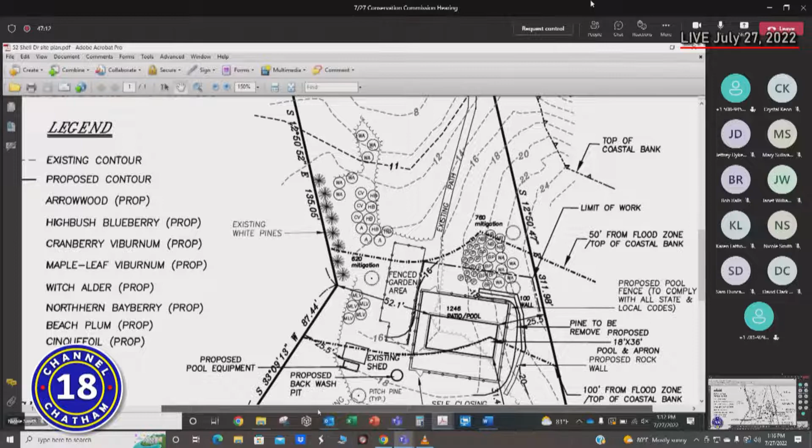Well, it is understood, but we are increasingly asking people to call out mitigation areas and either color code them or shade them, something on the plan. You should have a plan that's colored. I think what she means is you shade the whole area, the 1380 square feet, around in red. Right, I understand that, but in this particular case, what I did was take the square footage of each plant and multiply it by the number of plants, and that's how I came up with the total.

So then we actually have 3 separate mitigation areas. Right. And part of the reason this becomes significant is that when we get to an order of conditions, we generally ask people to demarcate the mitigation area in some way so that landscapers and other people don't inadvertently go in there and mow. With 3 separate areas, I mean, you can see the top left border one is a little bit spread out, so I can put a border around this and hatch it, but then the plan gets real busy.

I wonder if it isn't - that's easily done, yeah. You draw a line around it on the ground as well. I know what we'll end up doing, again like I did with the number, I'll round things off - if there's jigs and jogs all over the place, I'll just put in 3 or 4 stakes as opposed to 20, just to give you a sense of where the area is. Just anticipating down the road that we don't have an issue.

For 59, we're proposing 70 shrubs, including bayberry, beach plum, Carolina rose, along with herbaceous grasses such as American beach grass, little blue stem, and switchgrass planted in between the shrubs.

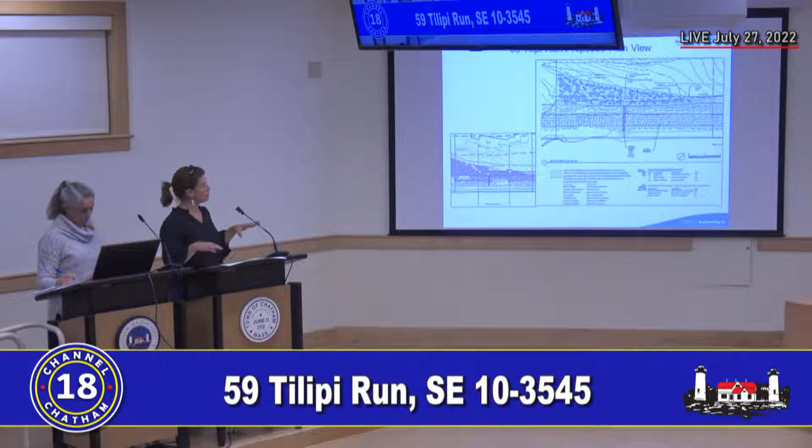For 75, it's a similar approach - we'd seed the area, blanket if needed, and then plant the shrubs. In this case, we're proposing 127 shrubs: bayberry, beach plum, and Carolina rose. Similar to the other project, we're also adding beach grass, little blue stem, and switchgrass.

This project in particular, we're also proposing a 2-to-1 replacement for trees. There are about 6 smaller oak trees that need to be removed because of the construction, so we'd be replacing them 2-to-1 with pitch pine, scrub oak, and white oak - that would be 12 trees total. There are more significant sized trees that fortunately are not going to be impacted, so it's really some of the smaller trees on the site right along the revetment.

I'd be happy to answer any questions. It's a fairly straightforward planting, but it should provide a nice significant buffer of native vegetation for both properties.

Thank you for the presentation. I think typically we like to hear from both sides of the fence, the engineering and the mitigation, because it all sometimes interacts with each other.

We've added the grading, and on 75 we've also added a couple dry wells because of the grading and being able to catch the stormwater runoff.

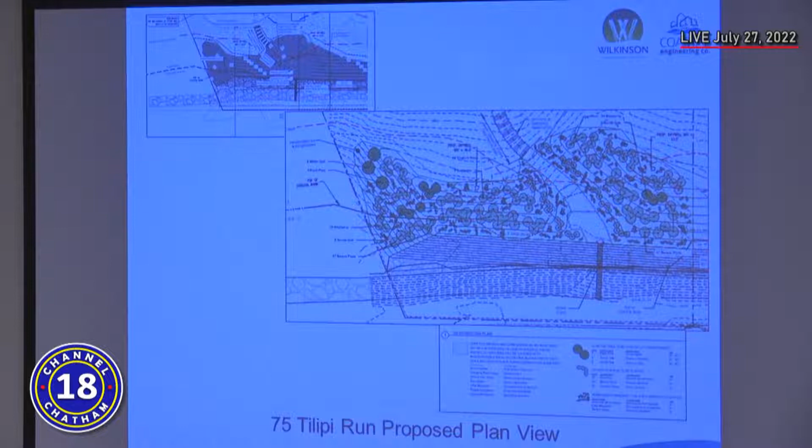It's just that whatever vegetation we are removing or placing the fill over is where their restoration plan comes in. There will be no removal of any additional vegetation in the area below that lawn or landscaped area.

I will ask a question - I know you want to discuss 27 separately, yes if we can. However, I happen to have noticed, or maybe I don't think I saw any mitigation on 27. So is the mitigation on these two supposed to account for it? It is not. Okay, we'll do that later.

So Wilkinson is working on 59 and 75, and Crawford Land Management is working on 27. That will be separate. And due to the fact that there's that return on 27, we had to revise the plans a little more before we were able to get it to them for their portion. And the access is on 27 - there's a couple other things, so that plan is going to be a little different. So they haven't been able to get the restoration plan since we had to get those other plans over to them.

Well, that's good to know, helpful to know. And our revised plans have been sent, all of this has been sent to Greg Berman, and I know we're waiting on him for his report on this project as well.

Have you had conversations with Greg? Yes, we've gone back and I've given him all the updated information. I think he was really hoping for the updated, because we had given him the wave analysis and the initial ones. And then since we've given him the updated ones, I know right now he's on vacation, and he's working on a couple other projects. So busy guy, I don't know when he'll have this one. I don't know, Nikki, if he's given you an update.

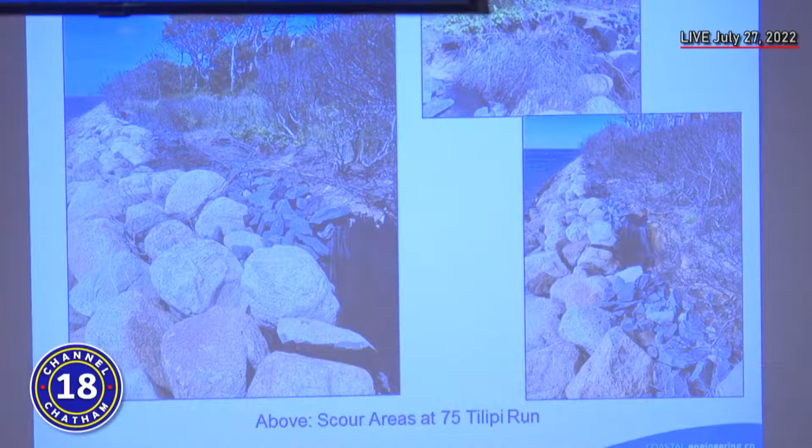So nothing's going to encroach into your new planting? Oh, I see what you mean, from the neighboring property potentially. Is there any way you could put some kind of open area in through there if there are invasives? Sure, I think the way our plan is shown there would be some space between the shrubs and that property line. Just looking from above on GIS, it's hard to tell, but it doesn't look like there's a lot of invasive stuff on 97, the next door neighbor.

It's just something we've increasingly focused on, Katrina, protecting mitigation from neighboring invasive patches. The only thing we've come up with is the mow strip approach. I ask all the specialists who come in here what they think about that, is it an effective or pointless way of trying to protect a mitigation area? It certainly would provide visibility, so you could see if the invasives were encroaching. I think it's a good idea.

Unless it's going underground, which they typically do. Right, the bittersweet roots travel 20 feet underground, I happen to know this for a fact. But if there are, you'll take care of them, you'll eradicate them?

If you added a condition that said we would notify Nikki or something, we'd love that. I would say just, when you go out there, evaluate the property line and see if you think invasives will come over. If there are, do a short 3-foot mow strip between the 97 or 95 and 75 properties. Otherwise, you can go right up to the property line, as you've basically proposed.

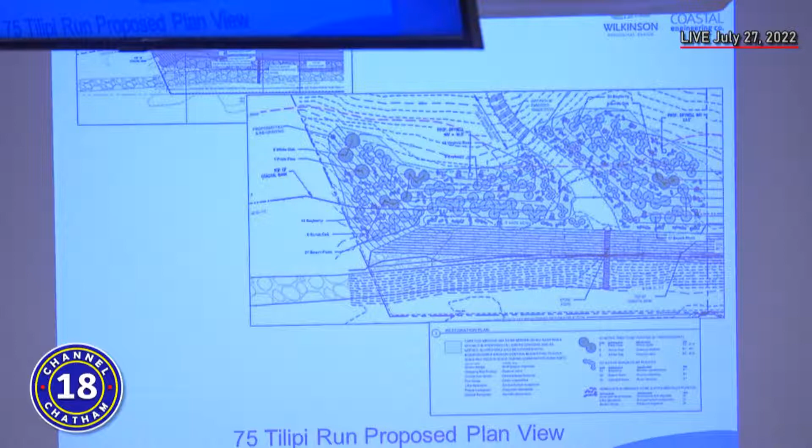What kind of material is that on the path? It's just going to be the dirt path. Where those stairs are now, there's existing timber stairs, but at this point, because there's going to be fill there, it'll just be the dirt path up to some granite steps. We're going to remove, I think, six granite steps - there used to be a number of timber stairs there that are kind of falling apart. So you think the dirt path will be stable enough at the top there? Yeah.

And the angle of the new revetment, will that affect the beach differently? Because we are proposing, I believe, a shallower slope than what's existing. With the shallower slope and the higher revetment, it's going to absorb more of the wave energy and there'll be less wave reflection, so there should be less scouring at the bottom.

We would just request the continuance, get Greg Berman's input. This is basically just an update and a discussion, but what I was thinking is presenting this so we get any of your comments, and we can potentially come back with revisions or answers to the invasive question. I can get those volumes for annual nourishment, and we may give a little more on access if I can talk to Denny a little more for next time. I can work with him, since he's been out there and seen the existing conditions, on getting more detailed construction means and methods before the next hearing. Hopefully we'll have Greg Berman's report in enough time to also respond to that before the next one. So we just have a continuance here for this, August 10th again.

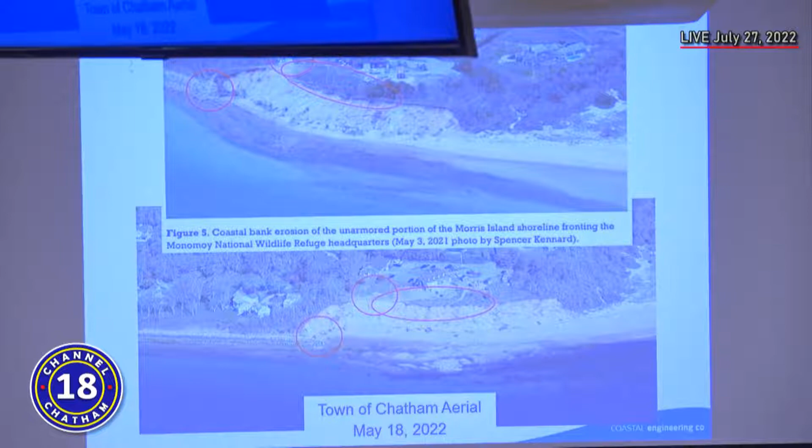Just a couple of updated pictures. I know last time I showed the May 3rd, 2021. And here I'm pointing out, we got some aerials from Ted Keon, May 18th, 2022. You can see the big change in one year from 2021 to 2022 in this area. And I know some of us were out there.

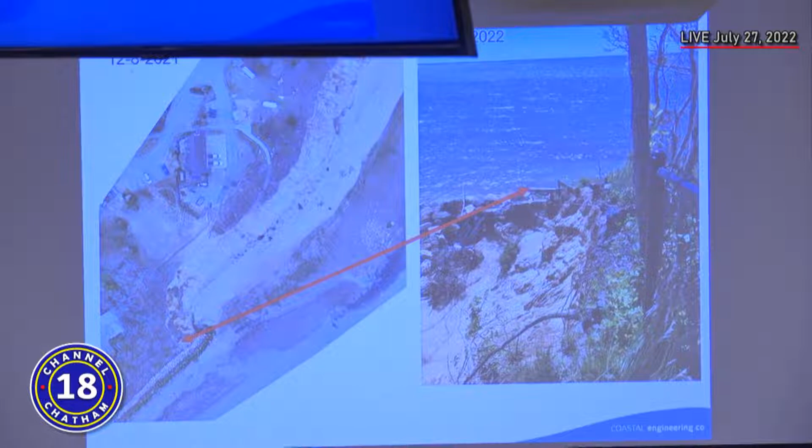Coastal went and did an aerial last December, and I'm trying to point out the stairs on that aerial versus the stairs in the picture. When I was out there, all the stairs are gone at this point. I know we were out there in April, and you can see those upper stairs were there. Then in the picture in June, that black post is the fence post. I would not suggest going on the other side of that property line fence at this point, which we were all pretty much on the other side of back in April.

So with that increased erosion, we are really moving forward and going to be getting contractors on board to bid on this portion of it, because it will be separate from the other portion when it comes to bulkheads and being able to install the bulkheads.

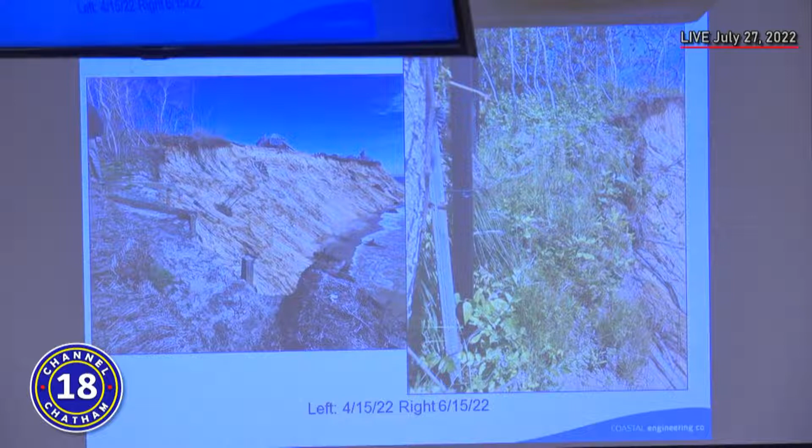The bulkhead will be installed, and then the revetment won't come until there's more erosion, because we're not going to plan on removing the coastal bank until it's eroded. Once it's eroded to the point where this revetment can be installed without removal of the coastal bank — and we're seeing the erosion pretty quickly — it'll be installed. So we don't plan on putting the bulkhead in and tearing out all the coastal bank that's there. We want to see it naturally erode. So none of that will be removed from the site, and then this will be built.

So whenever the bulkhead becomes exposed at the bottom, that's when you bring in the stone? Correct. Bring it in from the top or from the bottom? Hopefully from the same access that we would be using for the other portion of the project, but if not, we do have to look into other options for that.

The bulkhead will be installed pretty much where they can come on the driveway, and then there's a portion where they'd be able to get around the garage on both sides in order to get that. The crane could sit in the driveway and get the bulkhead in that way. Right.

Yeah, so it's pretty clear that things are proceeding as expected, if not faster. Yeah, it's surprising, especially in the summer months when we don't have a lot of heavy storms, but it's definitely been eroding. We haven't had a big one yet. There was one high water, high wind storm that we had that I know did a lot of that damage, but—

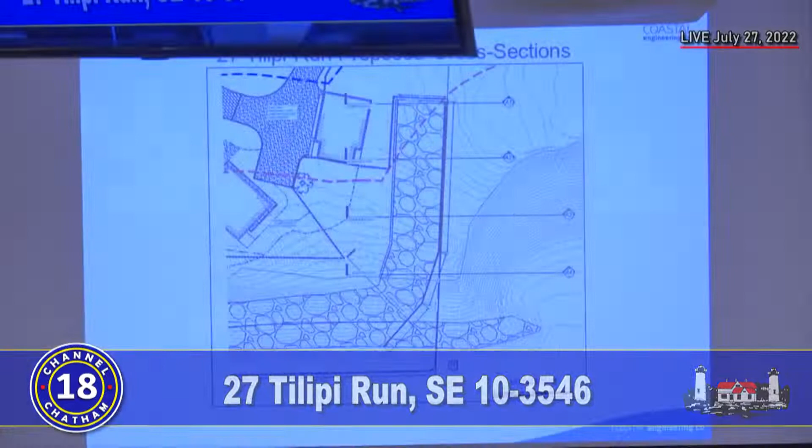So, and the new revetment, will that have a better effect on that area, or just the same, or? The way we have it is to go straight back to hope that we don't cause any extension towards their property to cause that end scour. Most of this, the waves would come and they'd roll down the revetment and keep that on a majority of that or all of it on their property. We're not trying to increase the erosion on the other property, so we have it going straight back.

Okay, thank you. You're welcome. Following up on that, isn't the wave action in this area typically coming from the northeast so that the waves will hit that side of the revetment? Some of it is, with the way the barrier is, it's also coming more straight at the shoreline there as well, because the opening is straightforward, so a lot of the waves that are really hitting in there are coming straight towards the shoreline.

Right, which is why I think you see that even erosion along that shoreline. So I'm looking at those two photos, and I'm envisioning a bulkhead and a much higher revetment in the areas where the red circle is, and wondering how is that not going to exacerbate the problem at the adjoining property?

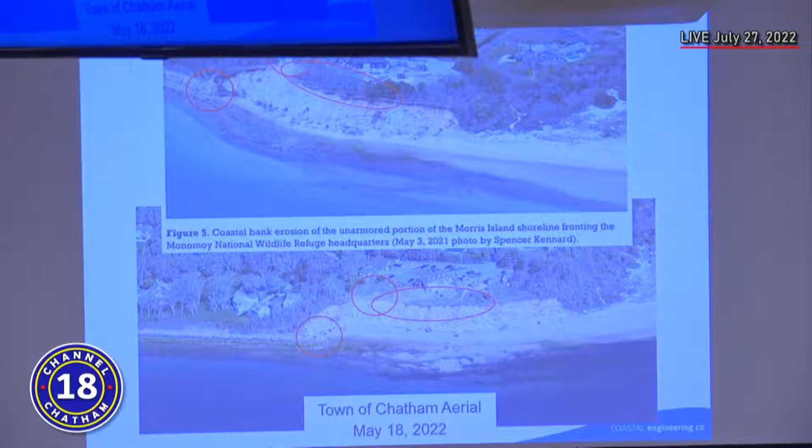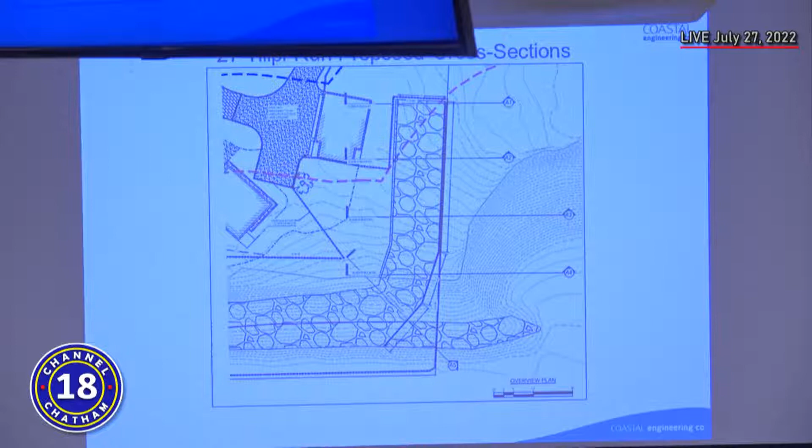We're pulling back an angle, so we're pulling back along right at the shoreline, pulling back from the property line, and then kind of rounding that corner and going straight back to try to reduce any of that effect that would occur on the other property, and then not putting in the revetment until necessary. So the bulkhead's going to be there, but not removing any material, and then once that material erodes away, just putting the toe there, because instead of the waves hitting against a vertical surface, it would be a sloped surface, reducing that wave reflection. That's what you would need to hope.

So I think we also will want to see a construction protocol for both the bulkhead installation as well as the revetment construction.

I'll just note in passing that a timber walkway or stairway in the VE zone is a no-no. So wouldn't approve it, and part of it seems to be crossing into the VE zone. So this one, we're not going to redo the timber staircase that used to be there. It's going to be granite steps within the new revetment for 27, and just a little timber walkway at the top, but no timber stairs within the lower portions, because we never recommend having those timber staircases below the BFE. Take a note of the plan, because it's hard to see, maybe because of the shading, but it does appear that the timber portion extends partway into the VE zone.

So where are we on mitigation for 27? I had to make sure we had these plans with the return and everything in there so they would have areas for their full mitigation, and this one so they know where they're going to be. Crawford Land Management's working on it, but they haven't had a lot of time because we had to make sure we had these plans with the return, since that's additional area.

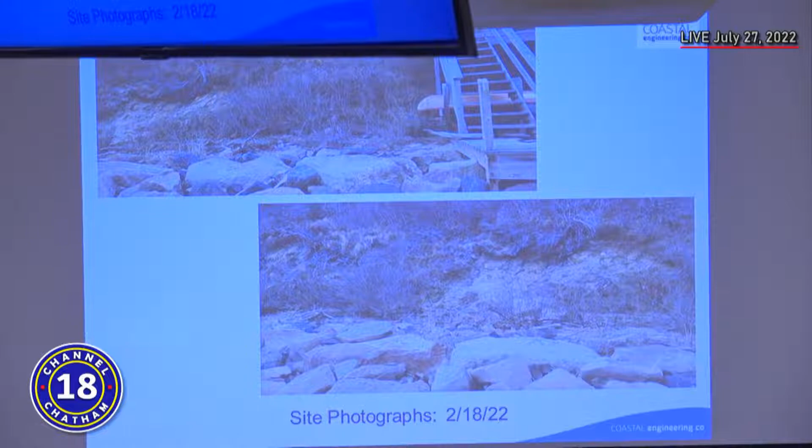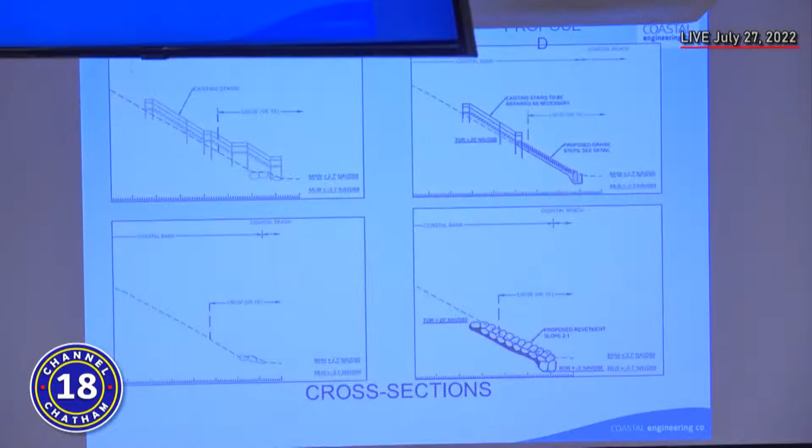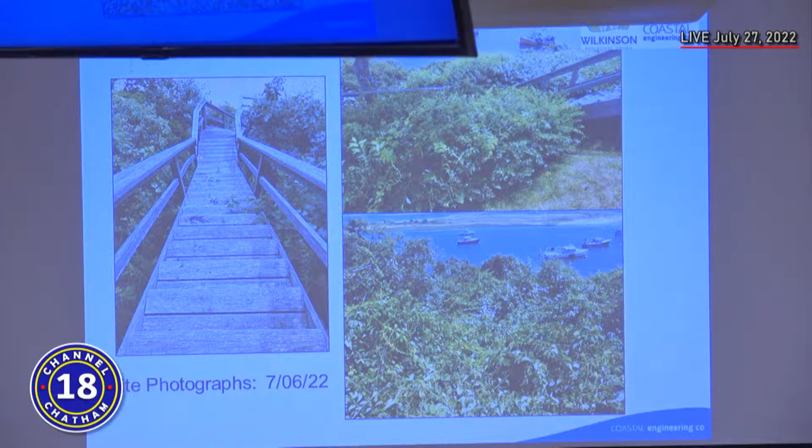We submitted a land management plan as well as a restoration plan. If you look at our restoration plan, there are really three distinct areas shown in different colors of green, based on the existing conditions. When we were out there doing our field work, it was clear that a squiggly line somewhat in the middle of the bank - everything landward of that, from the top down to the top of the coastal bank - was highly degraded and invaded with, as you saw from those photos, tons of bittersweet in particular. There's also Japanese barberry, shrub honeysuckle, and vine honeysuckle. So we would propose to remove all of the invasives in that area, and as you can see on our plan, plant the area with native shrubs instead: bayberry, beach plum, black chokeberry, and Carolina rose. We would also put down erosion control blanketing.

It's a steep bank, and we'll get that seed in place, the grass mix that we use, the Cape Cod meadow mix, that would grow to hold that bank in place. As I mentioned, there are 3 distinct areas. That's the first area, and that's really where the majority of our work would be.

In the middle of the bank, we have just kind of a lighter hatch. There are some invasives there, but it's not entirely invaded. There's still a lot of really nice native vegetation like bayberry, beach plum, oak, cherry, scrub oak, and some serviceberry. So we would just be proposing, as our restoration plan pointed out, to remove the non-native vegetation. We don't think it needs planting necessarily, but we would add seed to hold the stability of that area. Lastly, the area right above the proposed revetment - that's just restoring the area that would be impacted by the construction.

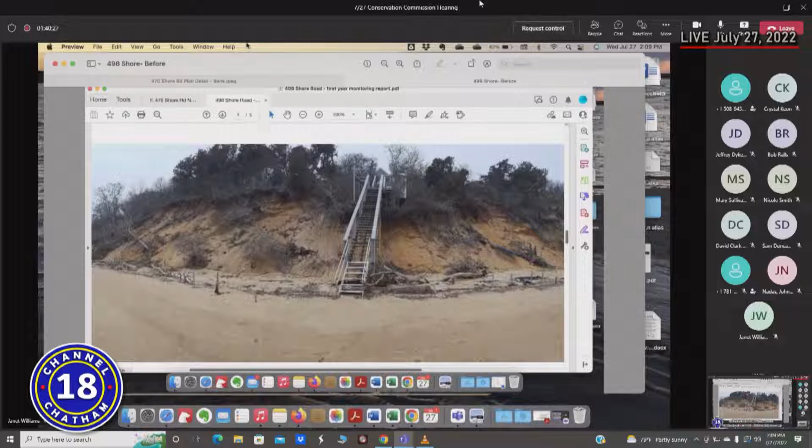So that was the pre-2018 condition, and your property is two more to the left. So we approved that hybrid system, and this is the current condition of it. It's doing very well. I think that being only two doors apart, two contiguous properties, they're subjected to very similar wave action and storm action.

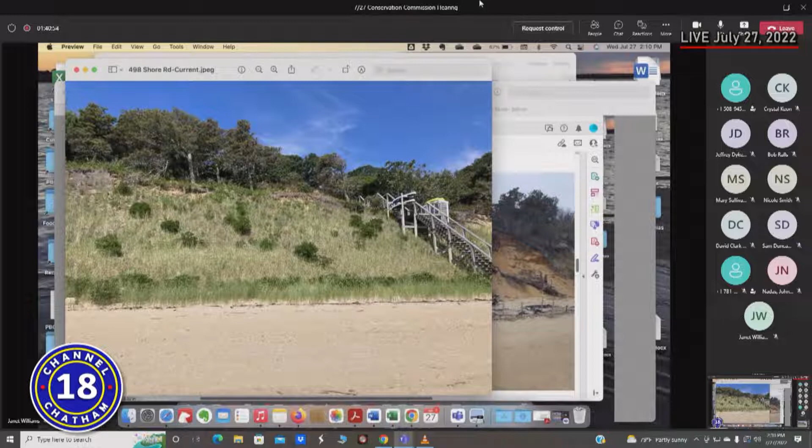So I would like to see more analysis done on something like this before we jump right into taking the revetment up to 20 feet. I think that needs to be examined.

I can provide more on that. Okay, that's great. And just jumping on that, though, I'm looking again at GIS from above, and it looks like 500 Shore Road doesn't have any protection, whereas 486 and 454 are both revetted. So it would be basically cutting out the revetment in the middle of two properties that have a revetment. That would be something I'd be curious about, whether it would work, because there's rock on both sides.

So in your analysis, I'd be interested to see what you thought about that. I should stop sharing. Okay.

Okay, and then let's assume that some increase in the height of the revetment is ultimately justified and permitted. It raises the question of what is the impact of the height, and I think that maybe whatever Greg Berman says about the other may be interesting and informative here.

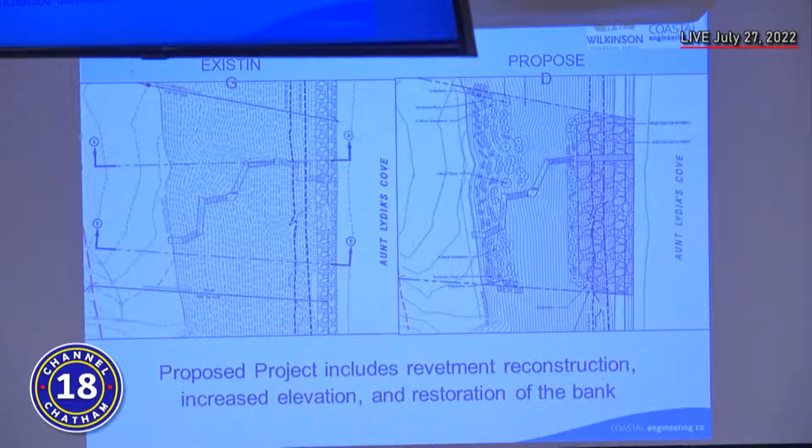So what's up against the property line is where there's existing rock on both sides. Both sides have existing rock revetments. So the bottom, where it's up against the property line, is where there's existing revetments, and then this tapers in once it's above those revetments.

And that taper you're showing there is sufficient to prevent any end scour? It would keep it on their property - once the waves get back to the property line, once the waves are at that height and any scour, it should keep it right on there. What we've noticed is end scour is typically around 5 to 10 feet, which is why we do the 10 feet at the top of our tapers.

Right, nourishment, I noticed it's 9.5 cubic yards annually, but it's focused on these ends. We like to keep that focused on those areas because if you place nourishment on top of the rocks, it just washes away much faster than what that erosion rate would be on the regular bank. So that's why we focus it on where there's bank area, but that can always be conditioned separately. We could tie it to whatever the annual monitoring of beach elevation is telling you about where nourishment might be needed. We have some conditions for that. Okay, on to the mitigation plan.

So I read the report about the top of the bank being extremely degraded by invasive vegetation. Hang on one second, I want to see here. Oh, it's going to open that way. So my question is, is this going to work? It's showing up there, but are you projecting? Okay, just give that a second.

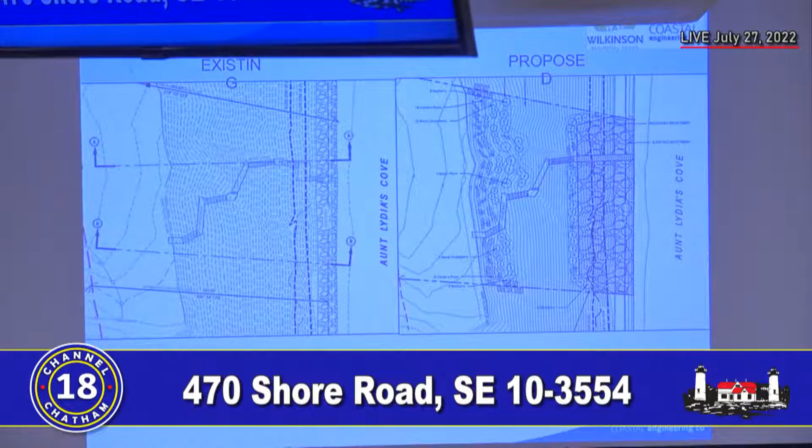That photo you showed, those large oaks are not in that area - they're outside of where the majority of the removal is staying. That's the middle of the bank, what I'm seeing at the top of that photo, not the top of the bank.

Okay, that's helpful, because I couldn't get to the top and thought that's what I was looking at. Is there a vegetated buffer strip at the top of this bank, or is it lawn right to it? I think we might want to think about putting something up there to protect that bank from erosion occurring from the top - that would be sensible.

That's all I have. Did you leave any questions for anybody else? Well, they sort of flowed in order, so I just decided to keep going. I'm going to shut up now.

Since you brought up VBS, what sort of vegetated buffer strip are you thinking? We do have requirements for VBSs, so we'll have to go back and look at the plan, see how much area is available and what makes the most sense. I'd look to Katrine's expertise to propose something designed to facilitate protection of the top of that bank.

All right, anyone else? Comments or questions? Bob? Got a couple, thank you. Again, on the property lines, are there any invasives that will encroach? Definitely on the northern property line.

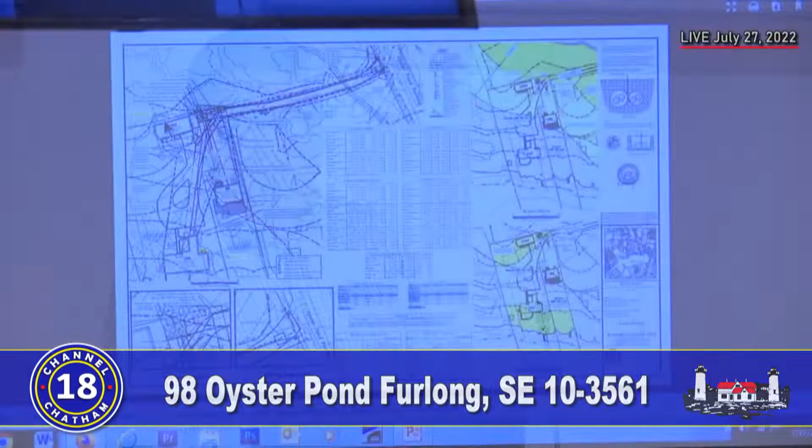So for the purpose of, let's assume the owner actually applies for a certificate of completion for their project - it'd be good to have that designated somewhere so that the agent at the time can go out there and say, I know where that is, I know where the mitigation's going to be, just on the diagram itself. Yes. Okay.

Next to the area where you want to put the blueberries, is it invaded with invasives? Terribly - the town has done a poor job maintaining their conservation land. So what I'm thinking is, what if that area were just seeded, and you put the blueberries somewhere else where it could be better maintained on the rest of the property.

So pretty much every contiguous area that we have to a wetland on this property is invaded. Out on the coastal bank, we have all kinds of non-native invasives from the town property coming onto the subject property - honeysuckle, porcelain berry, bittersweet.

How about it next to one of the buildings or up in the open area somewhere? We certainly can - I think it's a good idea, so they can be protected. There's a lot of lawn area between these buildings that could easily be turned into that - there's a surplus of lawn.

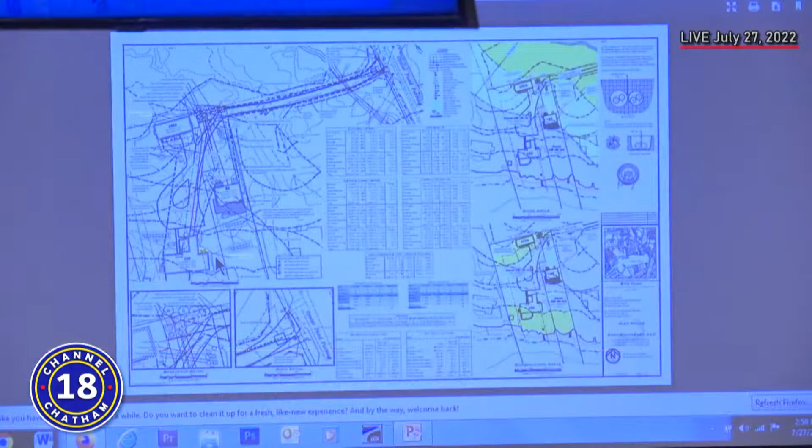Okay, great. I'll make a motion that we send this to the work session for an order of conditions on August 3rd, 2022. Second. Roll call vote. Bob, aye. Janet, aye. Karen, aye. Cheryl, aye. Mary, aye. And I vote aye. Thank you. Thanks, Bob.

All right, the next notice of intent is 50 Seachange Lane, Ben Morgan, map 3B, parcel 81A, S1. Again, it has an SE number, SE 10-3564. This was for expansion of a deck to access the pool and formalization of a view corridor.

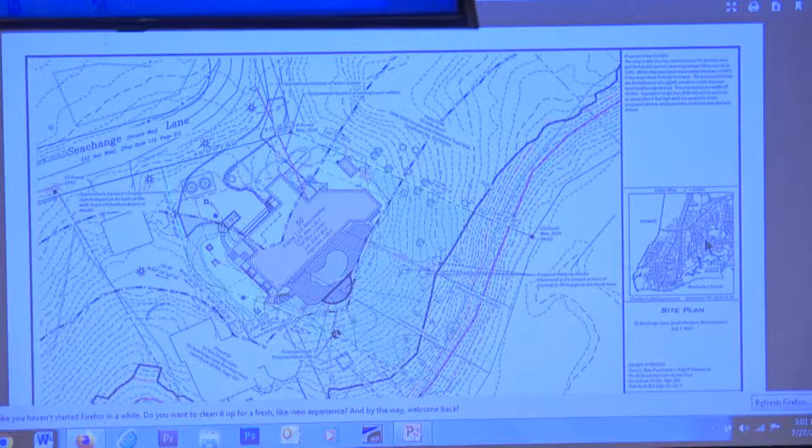So the mitigation for the deck is going to be a black oak and three inkberry bushes. We have them noted on the plan as a provisional location that will be more exactly determined on the ground where the space is best suited for them. There will also be a small pine tree that will be left in place as it is. Any trimming proposed for this view corridor would leave the vegetation at a height of, at a minimum, 5 feet, excluding the mitigation plantings and the small pine tree noted therein.

So the resource area of interest is the coastal bank, on the south and east sides. As per town bylaw, the view corridor trimming is allowed in the NDZ. However, we're requesting a variance for it regardless. So happy to answer any questions.

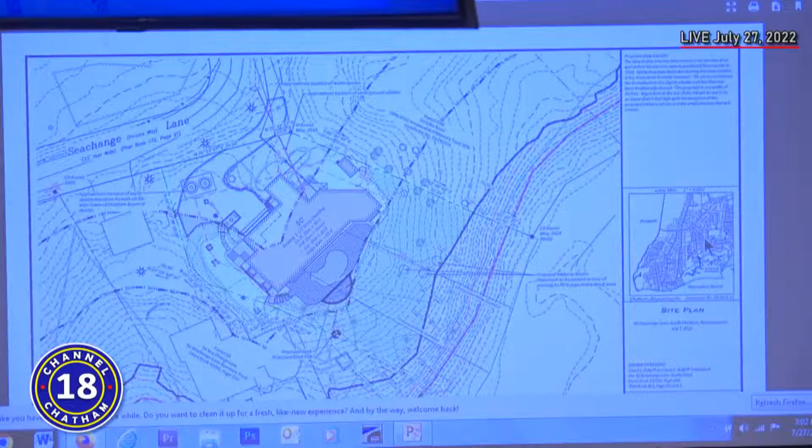Okay, thank you. I just want to make a comment on the comment you just made. I think it's also in the narrative where it says view corridors are allowed, but you're asking for it anyway. The way I read the regs is that the view corridor can be permitted, so it's not like it's something you don't necessarily have to ask for—it has to be approved. We're not only asking for it, but we're also requesting a variance for it just to cover, because it's in that gray area with that list. I'm just quibbling over the language, that's all. My apologies. I just want to make sure that we're on the same page. Your language says view corridor is allowed exception to wetlands protection laws, but a variance is requested regardless. I'm just saying that in all cases, these sorts of things may be permitted, just to be clear.

Okay, that little technicality aside, I'll open it up for questions right now. If anybody has any. Nobody has any? Do you have any, Bob?

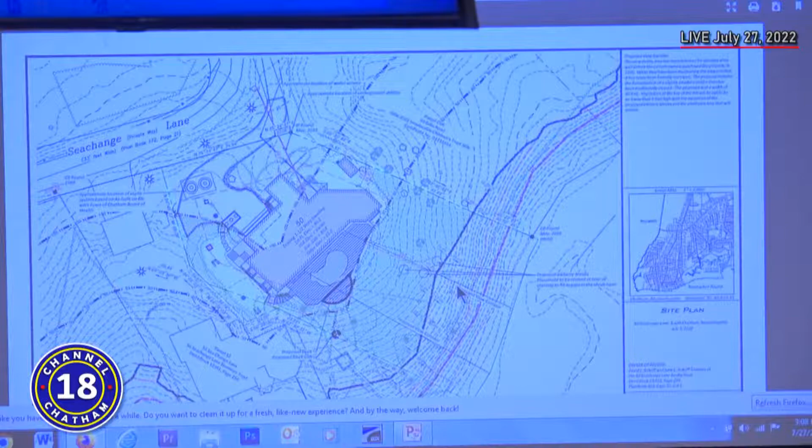Okay, so that does seem like a reasonable view corridor for a property like this. It's a magnificent view that the property has, but that does seem reasonable to me. It's just all about the tree topping, so I'll stop talking about that.

Anybody else? Just on the view corridor note, we would want to mark that in some way along the edges of the corridor so that it doesn't gradually increase over time. What sort of marking would you have in mind? I wouldn't say a fence really in this case, maybe just a couple of posts down closer to the bottom, and then either there's some markings on the deck or something, so that you can stand on the deck and look at the post.

Something very practical, unobvious unless you're looking for it type of thing. A few posts, or put a couple boulders or something, just to know that we don't trim past this. And if we have a height of 5, I'd want to have a post that comes up to at least 5 and put a birdhouse on top of each one or something. That'd be great. Just so that you can stand in one spot, look at it, and direct a guy to, okay, don't cut any more to the right.

Yeah, just something very natural. But if we arrive at the desired solution, we would never have to have anybody down there cutting anything.

Can I clarify what the desired solution is? Please. To stop topping oak trees, what are we suggesting? We let the oak trees grow or remove them? Well, I'm just thinking back to similar projects where what happened was trees were removed and replaced with shrubs. Lots of native shrubs in the approved view corridor. Otherwise, no more topping has to occur.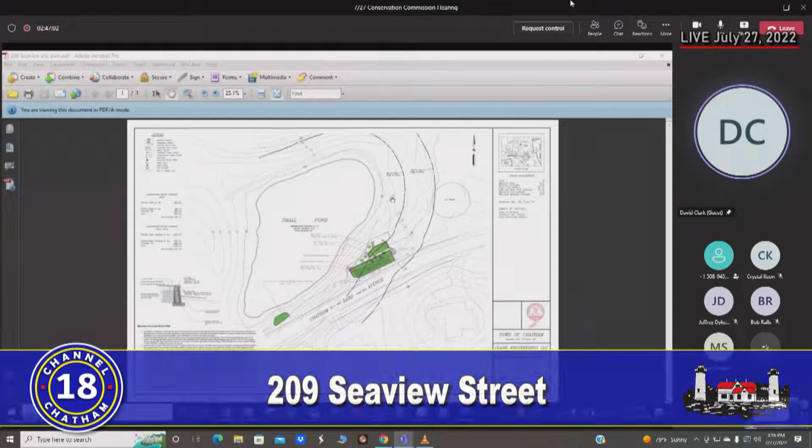This golf course is owned by the town. The 7th and 9th tees have been an ongoing project for the town ever since taking ownership of the course. I started working on this back in the 90s with Dan Tobin.

Back then, the golf committee came up with the idea of expanding the tee, but it was going straight out from where it is now, and obviously that would have required a very large retaining wall and a tremendous amount of fill. Over the course of the last two decades plus, they've tried other solutions.

One of the problems was trying to get grass to grow. They changed that, gave up on the grass, and changed it to artificial turf. There was erosion on the footpath down towards the 7th green. That problem was taken care of, I think, 10 plus years ago with a porous concrete walkway. That seems to be working well.

But ever since the town took ownership of this, there's always been competing tee-offs from this shared tee. Obviously the 7th and the 9th fairways are accessed from this tee. So the committee got together again and came up with a different idea that didn't require the fill that the proposal 20 years ago did. Basically it's dropping down with an expanded 9th tee to get rid of some of the conflicts on the upper level, but also expanding the upper level slightly so as not to have an enormously high wall.

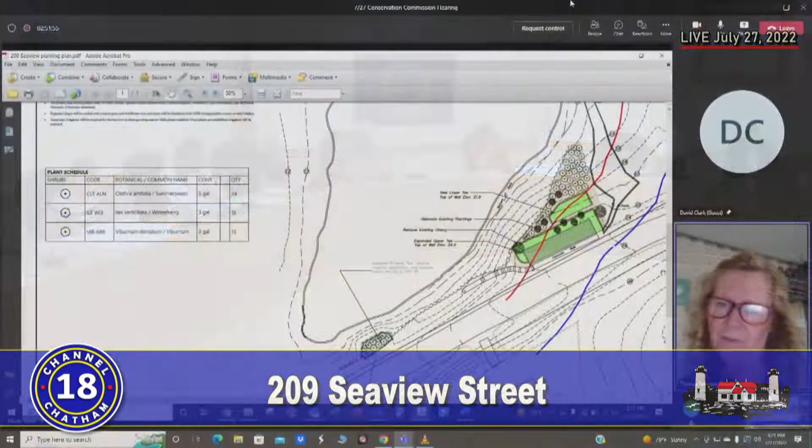Thanks everyone, Theresa Sprague with Blue Flax Design here on behalf of the Town of Chatham. As David pointed out, the existing conditions around the pond, the entire perimeter, are pretty overwhelmed with invasive vegetation. We looked at that as an option for providing mitigation, but it's an extremely large project, and not one the golf committee is ready to take on at this time.

So in lieu of that, we are proposing to stabilize the slope just below, between the new lower tee and the existing vegetation around the edge of the pond. That area is currently bare, and as David pointed out, it's experiencing some erosion from runoff from the tee. The reconstruction of the new tee will significantly improve that.

Once that area is regraded and construction is complete, we're proposing to seed it with a native grass and wildflower mix, blanket that with 100% biodegradable erosion control blanket, and then plant it out thickly with woody vegetation, including summer sweet Clethra alnifolia, winterberry holly, and arrowwood viburnum.

In addition, the existing tee just to the southwest will be abandoned. The invasive vegetation encroaching on that will be removed, and that area will be replanted as well. We're proposing to plant 50 native shrubs, plus the native grass and wildflower mix, which I think will do a really good job helping to stabilize that steep slope heading down towards the pond.

So with that, happy to answer any questions about the proposed mitigation, which is really in the form of stabilization and helping to slow some of that water down before it reaches the invasive plant vegetation directly located around the pond. Obviously there'll be an opportunity to leave a small area between the invasive vegetation and the proposed new plantings, so they can be maintained, string trimmed, or pruned back to prevent them from overwhelming the newly planted vegetation.

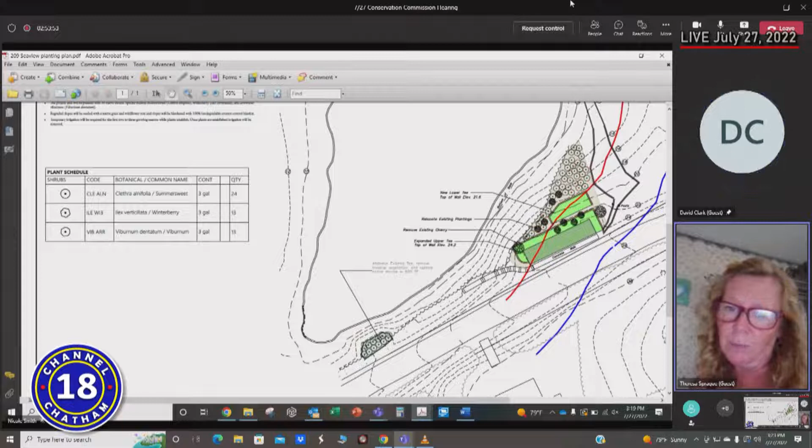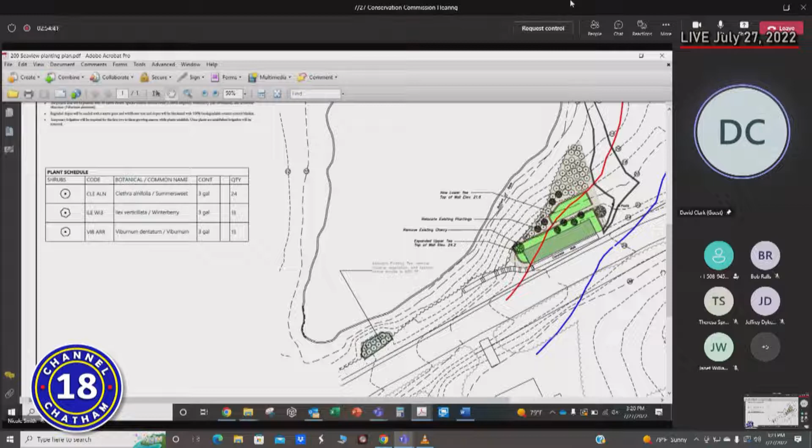David Clark here. Along with the cherry tree off the southwest corner, there's a yew on the northwest corner that has seen its better days. It looks like it's been hacked up quite a bit over the decades, and it's right on the edge of construction. So rather than trying to replant that, being a yew, we will modify the plans to show a replacement, lower in elevation so it doesn't become a hazard for the golfers, but something equivalent to what we're proposing to remove.

Okay Dave, thanks. So there's a tree at each end of the new tee that would come out? Yes. Is that basically it? Okay, yes.

Guess I'll start. Tell me or clarify for me why that lower tee has its purpose. Because the 9th and 7th holes share the same tee, there's a conflict with players leaving the 6th green and trying to get to the 7th, and waiting time for folks coming up from the 8th green and trying to tee off to the 9th. This has been a recognized problem by the golf committee for decades. So, like I said, 20 years ago or so, we had a proposal to expand the tee in a similar configuration to what you see now, but that lower tee was going to be at the same level as the existing tee. So it's providing another area for teeing off that doesn't conflict with folks trying to tee off on the 7th. Okay, thanks.

I think we have somebody from the golf committee, I presume? My name is Bruce Bogardis.

I'm the chairman of the golf committee for the town.

The primary purpose for the additional tee area is that it's artificial turf right now. When Chatham Bars Inn had the golf course, it originally was grass, but they could not maintain it. The issue is when golfers tee off, they take divots, so you need to move the tees around to different areas, and it just all turned to dirt. They could not grow grass, so that's why Chatham Bars Inn put in artificial turf. It's compacted and very difficult to play, kind of like playing at a miniature golf course, not a nice golf course.

I was going to suggest the mitigation plants be brought closer to the pond, but I didn't really see a need — on the east end of that pond, I think there was always a bare area. But you say there are a lot of invasives there now, Theresa? Yeah, the whole edge of the pond is pretty thickly covered in invasive vegetation. So we're bringing that mitigation down below the new lower tee, in an area that's currently just bare slope, and that's kind of a tough area for plants on that slope, isn't it?

It will retain water, but I think once the area is regraded and the tees are reconfigured, David's plan shows in more detail how water will be managed — the new tee reconfiguration will help with water management on that hot slope. The plants we proposed here are ones we'd often use in a rain garden situation because they tolerate both regular inundation and drought conditions. So that's the purpose behind the plant recommendations for that area.

And the tee that's going to be abandoned, the women's or ladies' tee, that area around it is heavily invaded as well, isn't it? Yeah, you can see the edge of vegetation showing on the plan on the screen right now, and it's just creeping into the area of the tee. So we'd really just be removing that invasive vegetation and then replanting the tee area. You can see the little squiggly line, for lack of a better description — that's the edge of the existing vegetation, and it's kind of climbing into that tee area right now. So we would just remove the invasive vegetation there to restore that tee area.

And the cherry tree that's going to be removed — could that be pruned, or does it have to be totally removed?

I believe it has to be totally removed. I'll let David speak to the reconstruction of the retaining wall. Over the decades, folks have taken liberties pinching branches, because if it was left to its own, I think it would be much more substantial now and definitely in the line of play all the time. So it's right on the edge now, and because we're expanding in that direction, it needs to come out. We are providing a replacement for it that'll be out of the line of play and won't be subject to midnight pruning, so to speak.

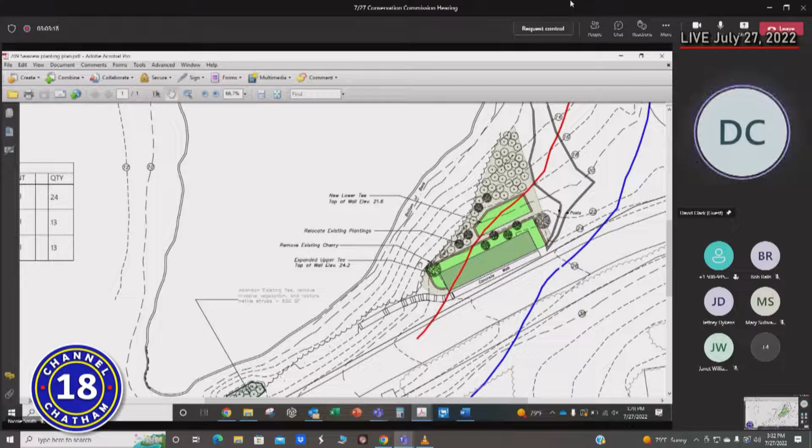You're not suggesting, David, that some of the golfers do in their bags guerrilla pruning? No, it was probably somebody trying to improve their view. Not their lie.

That's all I had for now, Bob. Okay, thanks, Bob. So if I were to ask the question, is that lower tee really needed, the answer would be absolutely. Because we always have to look very closely at any sort of encroachment into the no-disturb zone, which is what this is.

I think the commission can make a finding that there's a net public benefit to this encroachment, similar to findings the commission made with the Upweller project and the replacement of the south jog at the Fish Pier, where there was an encroachment into an actual resource area, and the commission did make a finding in those cases that there's a public benefit for doing that.

Let me just say, that was an environmental benefit. But golf, I'm not sure if I can lump into the same category, but I'm a non-golfer, so that's the way I would look at it.

Well, just to put it in perspective, Seaside Links had 27,000 rounds of golf played there last year, and the town issued 2,800 shellfish permits. Just to put it in perspective. So I think this is a very minimal encroachment into the buffer zone, given the size of the golf course.

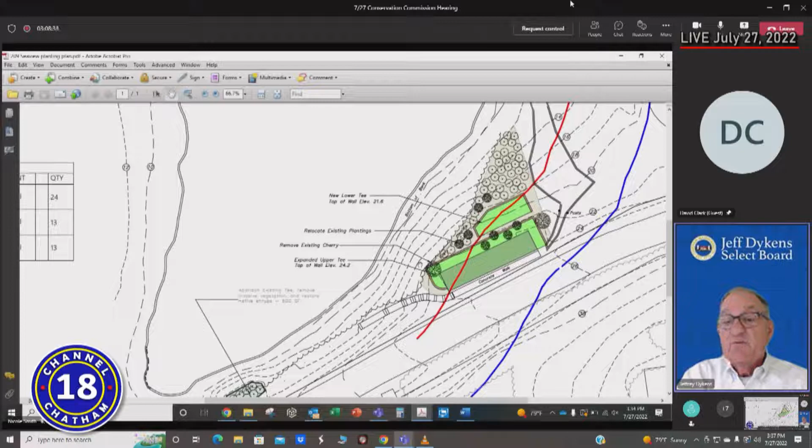Yeah, I think we're probably going to approve it. No matter how we personally feel about the environmental impacts of golf courses, but I understand it's a small course with great benefit to the town, and mitigation is being provided, and that's probably the end of the story.

Move that we continue 209 Seaview Street to the work session for an order of conditions on August 3rd, 2022. Second. Roll call vote. Bob? Aye. Janet? Aye. Karen? Aye. Cheryl? Aye. Mary? Aye. And I vote aye. Thank you very much.

Next we just have to do the continuance for the confusion with the address for 107 Main Street as it's listed, but it's actually 170 Main Street. Daniel and Catherine Ward, map 17C, parcel 33, new foundation with an addition and sewage disposal system. So we're just going to continue that until August 10th.

I'll move that we continue 170 Main Street to August 10th, 2022. Second. Roll call vote. Bob? Aye. Janet? Aye. Karen? Aye. Cheryl? Aye. Mary? Aye. And I vote aye. All right, then we have a request for a field change.

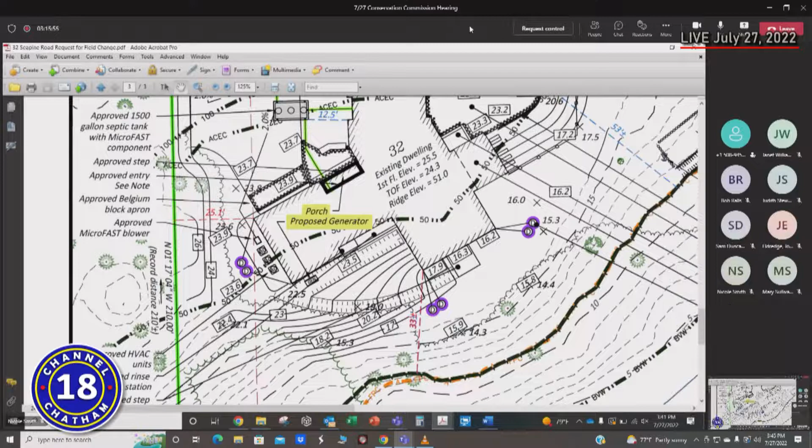Sorry, I'm just sharing my screen real quick. I guess I didn't think about it when I was reviewing it, but is this area that's all hatched, is that like some sort of patio walkway already? Show me, down, like where it says generator right here. I don't know, I'm trying to point on my screen like people can see that. Maybe Thad's getting in, I just saw something that said that. Oh, maybe that was yours. So where it says the 23.5, yep, is that already like an approved walkway that the generator is going on?

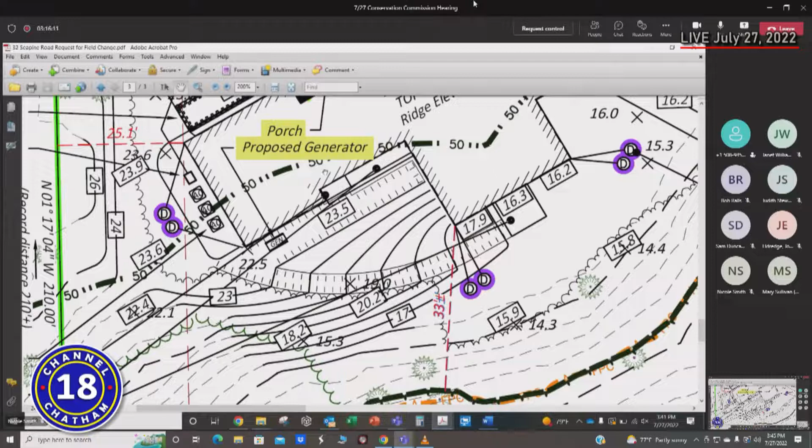I wouldn't put a generator on a walkway. Yeah, so I don't know what that hatching is. But then also, yes, the gas line is up here, so you would kind of think it would tie in up there. Yeah, it's probably going to be coming through the house. The gas line's probably in the basement somewhere, and then it's just going to be going through the house and into the generator. That's what I'm thinking.

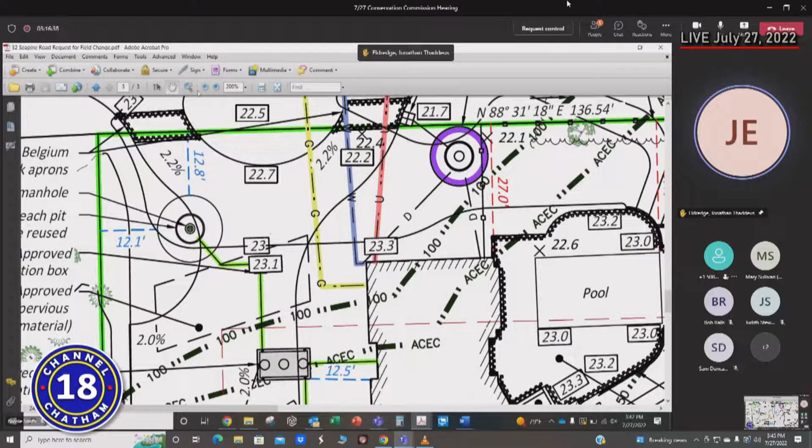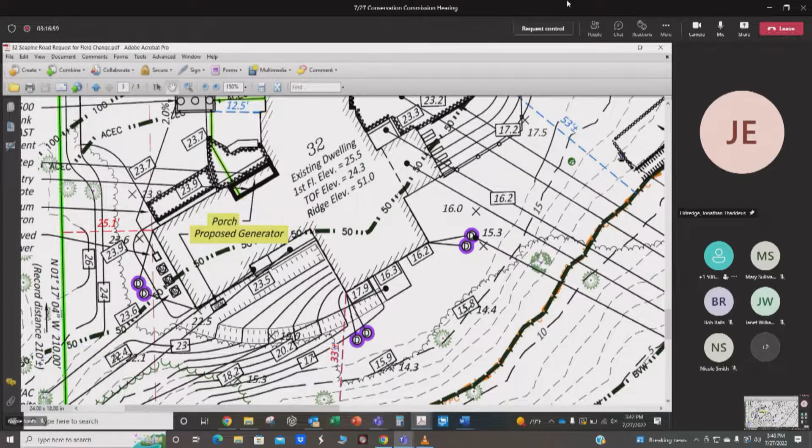All right, so I will call Thad. Oh, I'm sorry, Thad Eldridge is here. There was just questions on the location of the generator, and is it on something that was already approved, I can't tell what this hatching is, where the generator is located. And is there a better spot? Supposed to be- the generator is gonna be sitting on a pad, and the gas line was brought into the corner of the garage.

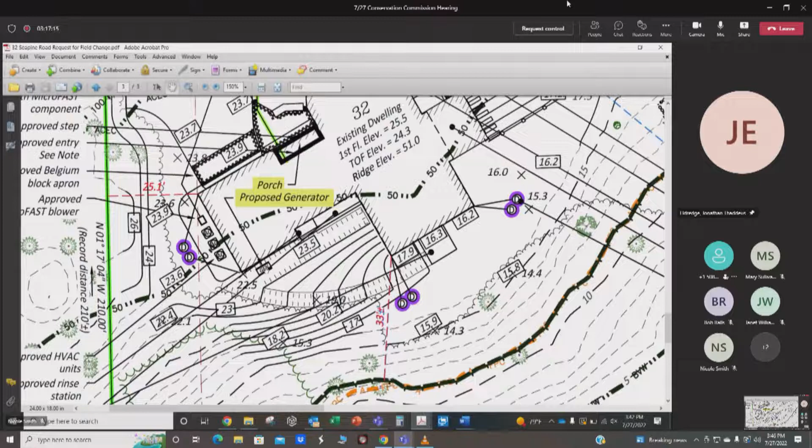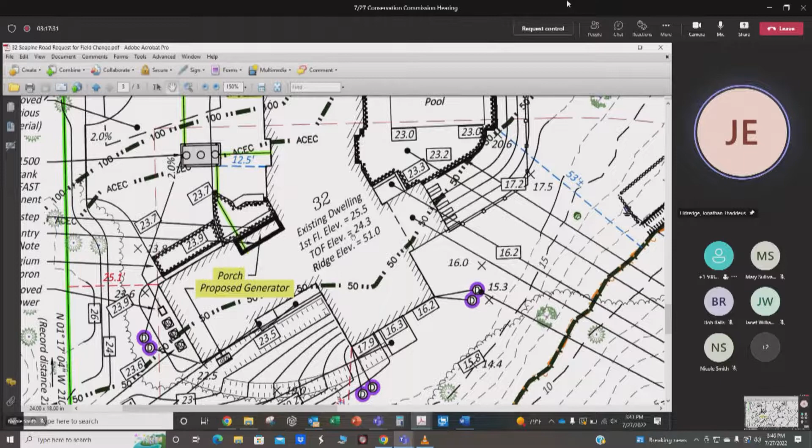Where's the garage, where they brought the gas line in? To the south. They brought the gas line through the driveway, and right near that 25.1 or the 23.6, the gas line was actually brought in there. Where, right here where the two purple- okay, just a little bit to the north of that, right up near the driveway. Oh, this one? You got it. It was brought in right to that corner.

So how does it get to the generator? You have to continue it, correct? Yes, they'll run a line to it. It's all through lawn, it's gonna be a little ditch witch and 18 inches down. Why can't the generator be placed closer to where that 23.6 is? We'd have to go back to the zoning board of appeals for either a special permit or a variance, because the generator has to meet the side yard setback.

And you already have that permit for this location? This location doesn't need a special permit or a variance, because it's more than 25 feet from the side yard. You have to be within- I see, the 25 setback feet of the property line. It meets the setbacks. Yeah.

Having just dealt with that. All right, and when we first went through this project, they weren't planning on putting in a generator, and then we lost power for several days, and they said we should really put in a generator. It's a common lament, a lot of people are saying that, including me.

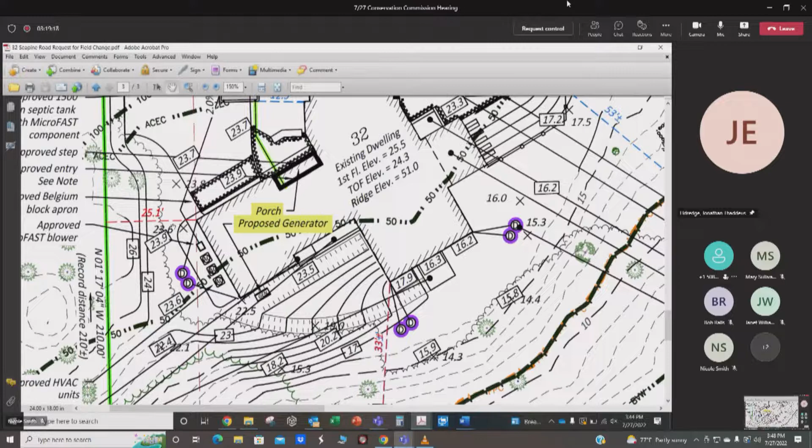Okay, are you satisfied with that, Karen? I understand why it's placed there, I just am worried about the fact that gas lines are going within 50 feet. If something happened - I know it's a big if, but I don't know.

You mean a gas leak in the disturb zone? Okay. We try and protect the first 50 feet, and here we are saying, go ahead, put a generator in it. Well, it would be natural gas, not liquid gas. I mean, if nobody else has a problem with it, I'm fine, but it's just me saying it's within 50 feet.

Isn't there any place else on the property that it could go that was outside 50 feet and meets the generator requirements for setbacks? Right next to the front door. Yeah, well, there you go. Problem solved.

Well, anyway, what does everybody else think? I don't recall a similar case where we've had this. I don't recall one. I'm trying to think of one. Don't think I remember one.

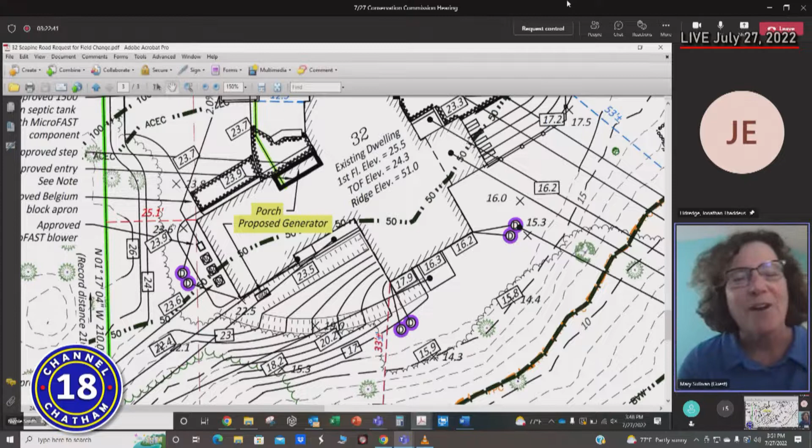And just to share, this is a common sentiment with commissioners. I remember in 2008, we brought in a subdivision, and one of the commissioners cut up all the plans. We had a permit for each one, and she pushed all the buildings into all the setbacks to be out of jurisdiction. We said, that's great - are you going to get the variances for us? It's tough, we have these contradictory rules all over. And we just do our best to thread the needle between them.

Well, I don't know if this is the ditch to die in. Probably not, I just thought I had to share it. Yeah, it's a good point, very good point - why do we always have to bend over? I agree. But anyway, can we live with it?

I guess, okay, I think we can live with it. This is the last one. And believe me, we will see generators. Thad, next time you go before zoning, just tell them conservation wonders why they're always the ones that have to give zoning way. Well, here comes the fun one.

The board of appeals doesn't write the zoning bylaw - it's the planning board that's supposed to write the zoning bylaw. Oh, that's true. Right, they just implement it.

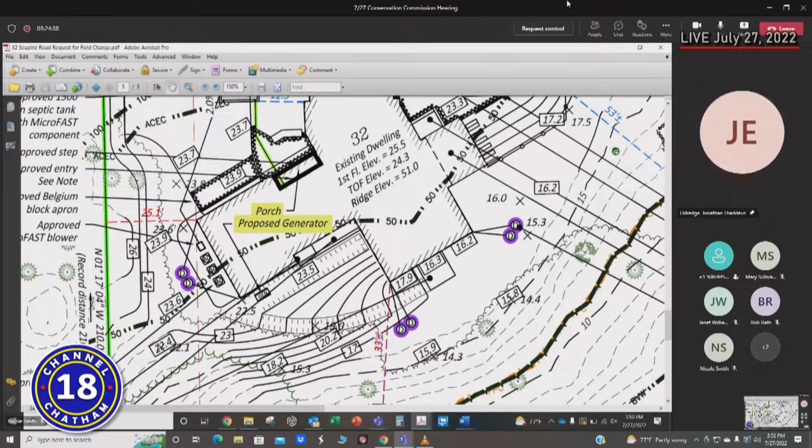Make a motion that we approve the field change for 32 Seapine Road. Second. Roll call vote: Bob, aye. Janet, aye. Karen - I mean, sorry - aye. I thought you were voting twice. Did I say Janet twice?

Cheryl. Abstain. And Mary. Aye. And I vote aye, too.

All right, well, Thad, how did you know to come back? Oh, I was logging in and having trouble with my microphone. Oh, I see, okay. All right, thank you.

Next we have the requests for certificate of compliance. They're all pretty straightforward, so I'm just going to open all three and we'll do one vote. First is 230 Stage Island Road, Stage Island Realty Trust, map 13A1, parcel D27, SE10 3184, land management plan, add to driveway, improve path and stairs. We have two for 354 Bridge Street, Bonnie, map 16B, parcel 9, SE10 759, septic system, and 102846, demo and reconstruction of the garage.

For 230 Stage Island, I had gone out there last March and everything was in compliance except for a pretty big bare area on the bank. If you want to see it, I can pull it up. But I went out there Monday and they had seeded it with native grass and it was doing pretty well. So all the bare areas have been overseeded with grass, so it's good to go.